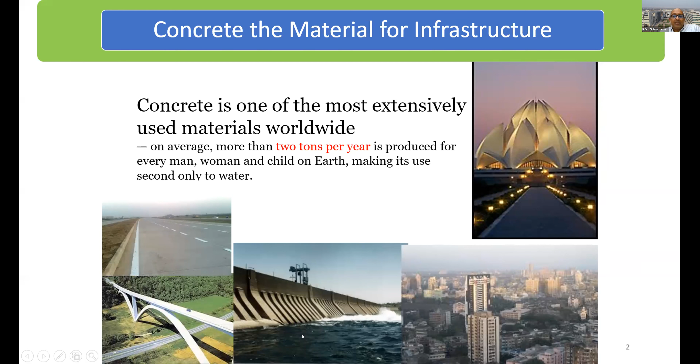Now, where do we use it? It goes everywhere, right? From our roads to our infrastructure, bridges, dams, buildings, it's everywhere. So the issue with this, of course, is that concrete is made with cement.

And the problem with cement is, if you look at the consumption of cement over the past few years, the past, present, and future, this graph nicely captures the cement consumption in the past, where we are today, and where we would be going in the future. If you look at the 1990s, starting from there, red is aptly colored for China, blue is India, yellow is all the other developing countries, and light blue is the developed, industrial countries.

If you look at it, China, even in the 90s, was probably the leading producer. But if you look at the cement being consumed in China today, it is enormous. And a lot of it goes into infrastructure. They have developed their infrastructure. Their economy has been growing on the back of the infrastructure they've been able to provide.

If you look at India, we are not far behind. Today, India is the second largest producer of cement, and all of our cement production is captive. We are not in any position to export. Whatever we produce, we consume. But going forward, if we go to 2050, India would become the largest producer of cement and the largest consumer of cement.

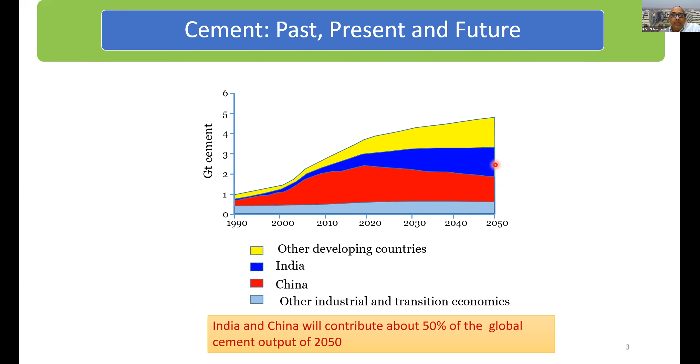Now that has a lot of repercussions because of several environmental issues, resource limitation issues, and energy issues that we will have to address. If we are not able to get to this point where we are producing cement in this quantity, or find some alternate for it, no infrastructure will come up in place, and then we can forget about having 8.5 or 9 or 10% growth of GDP. GDP cannot grow unless we put infrastructure in place.

Now, what are the challenges in cement production? Major challenges, and the numbers are staggering. In 2050, the projected demand is 750 million tons of cement per annum. This is the projected demand in India.

Now, if you look at cement, the major ingredient is limestone. And today, India is a limestone-rich country, so we have not been importing limestone; we use our own limestone to make cement. But the current available reserves of limestone are expected to last only 35 to 40 years. This is the good grade limestone that goes into making cement, and that good grade limestone is only going to last us 35 to 40 years.

Then, cement is an energy intensive material. It takes a lot of material and a lot of energy to produce. So if we want to continue making cement, we have to not only look for alternates to the primary ingredient, limestone, but also look for alternate sources of energy.

The third thing cement has been knocked upon is carbon footprint. Cement has a very large carbon footprint. Today, cement production is the third largest anthropogenic contributor of carbon dioxide in the atmosphere. This is a very heavy price we pay for producing cement. The reason it is the third largest anthropogenic source is not that every gram of cement produces a lot of carbon dioxide, but the sheer volumes. Cement production does involve carbon dioxide production, but the volume of cement we produce is so staggering that we contribute significantly to global carbon dioxide emissions.

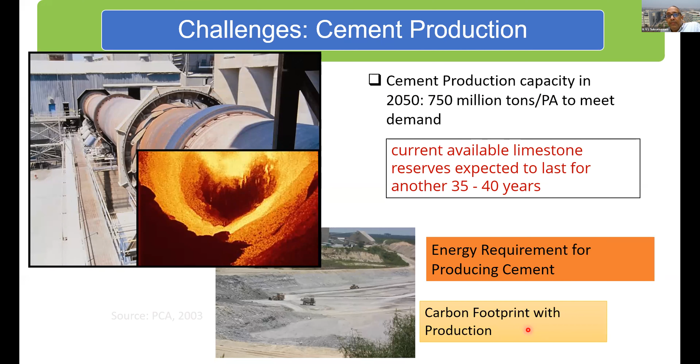So these are all major challenges that have to be overcome if we are going to talk about construction of the future, particularly using concrete. Now, how are we addressing this? Some part of this has already started. People started realizing this, and we started addressing this.

Today, if you look at cement, what used to be cement, it used to be clinker with gypsum. This is what we call OPC, the ordinary Portland cement. This is how cement was conventionally made.

Today, we are starting to look to replace clinker, the primary ingredient that we grind to make cement. So we are trying to reduce the clinker factor in cement by introducing additional supplementary cementitious materials like fly ash and slag, most of which are waste materials. So basically, it's a double advantage. We use waste materials, we reduce the clinker factor, and thereby we're able to produce concretes which have lesser material consumption, lesser energy requirement, and lesser carbon footprint.

Now, going further, there are other cements in production, an alternate cement going by the name LC3, where the clinker factor is reduced even further with the use of calcined clay. This calcined clay is not a good grade clay, it's basically the waste clay that often lies as mine overburden. They're able to reduce the clinker factor even more substantially while producing a cement that gives better properties than even the ordinary Portland cement.

So this work, understanding the chemistry, producing the material, all of this is currently ongoing. Then there's a whole new breed of materials called alkali activated materials, also called geopolymers, where we basically don't use cement at all. There is no clinker. We directly start with waste materials like fly ash or slag, alkali activate them, and we're able to produce cements which, colloquially, we call geopolymers.

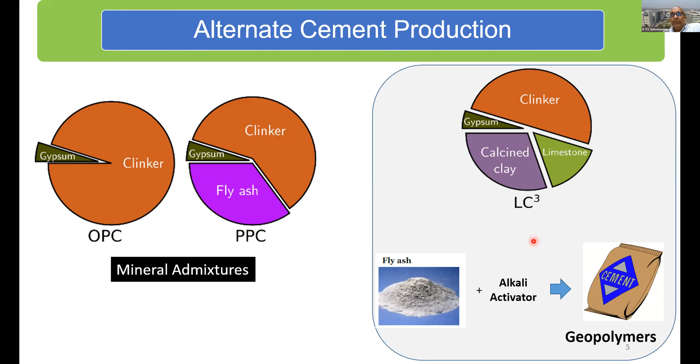So these are all concurrent developments taking place on the material front, where we are trying to address this challenge that we see in the future of supplying cement that would go into making the concrete we need for our infrastructure. Now, there are also challenges with construction.

One of the primary challenges with concrete construction is that we rely on forming at site. Forming at site means we typically assemble the formwork, pour concrete into it, wait for some time as the concrete gains strength and takes the shape of the formwork, and then we open the shuttering. Now, what that does is it limits us to using rectilinear shapes.

That means most of our structures, if you look around, are rectangular shapes, primarily all along. The reason is the formwork limitation - I'm limited by the formwork I can produce on site. Now, we know from basic mechanics that rectangular sections are not the most efficient sections we can use in construction. Perhaps something like an I or T section is more efficient structurally, but that is limited when we are talking about forming on site.

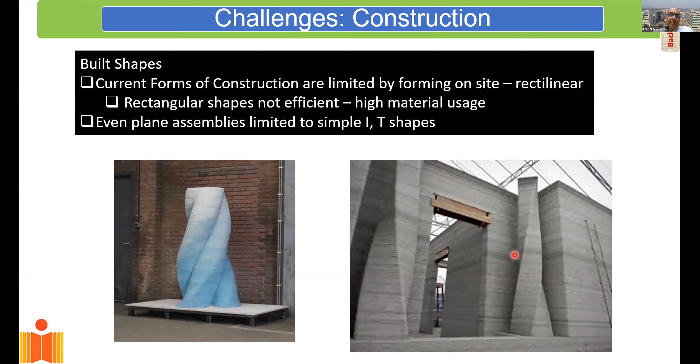That means I have to step out of this domain and start producing structures more efficiently with less use of materials, which give me the same performance and are lighter and take less material. But then I have to come up with new forms of construction. And this is where the other stream of research is happening, in terms of improving construction techniques.

Just to the other challenge, mentioned in the introductory messages - we are all looking to build faster. Everywhere we turn, we want to construct a building as fast as we can. Now, one of the limitations here is again the formwork, because the way we make concrete is I have to assemble the formwork, tie the steel work, then pour concrete. That limits the cycle time I can achieve with each slab. So we need to speed up construction.

We've managed to do that with improvements in formworks. But what if I can produce concrete without formwork? That is what we are working on. A lot of us are currently engaged in research trying to produce this form-free concrete. Form-free would mean that I don't need formwork — I can directly print a structure. 3D printing is a colloquial term used, but it's essentially adopting the techniques of additive manufacturing into construction.

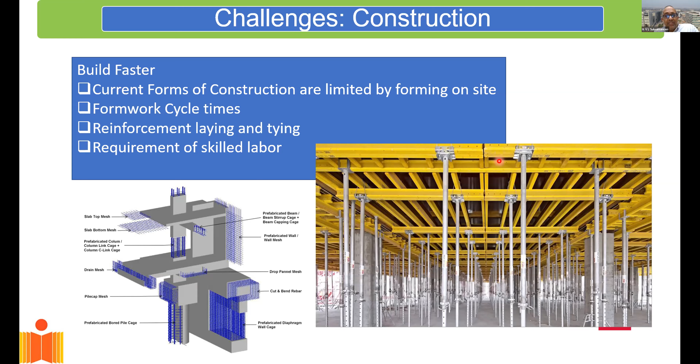These are all challenges that need to be addressed if we are thinking about sustainable construction of the future. Sustainable concrete construction of the future means we have to make concrete responsive to the requirement — I have to be able to make concrete that delivers on delivery and placement, producing concrete that meets my requirements as I'm placing it. I'll give you a few examples of what I'm talking about here.

It has to be long lasting. It has to ensure performance. Once I make a concrete structure, it should perform over its life without having to be repaired, and that life itself should be long. So I'm looking at structures that last long and give me the same level of performance. If it's a bridge, I should be able to use it — it should be serviceable over the life of the structure. While the life of the structure itself, I'd ideally like to double or triple, or make structures last millennia instead of centuries.

Then we're talking about low quantum material usage. I want to make concretes which, A, produce structures using less concrete, and B, use concretes with less cement, or probably use alternate materials. These are all the challenges we are looking at in terms of producing sustainable concrete structures in the future.

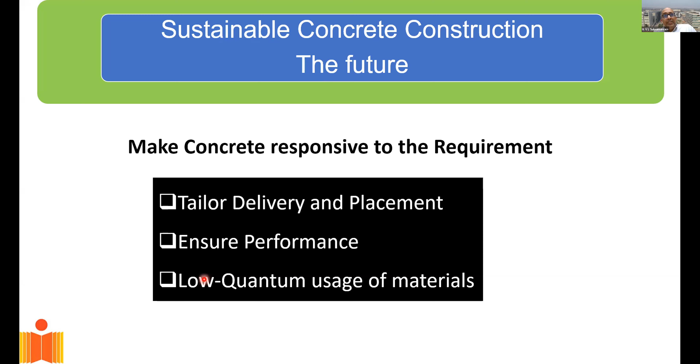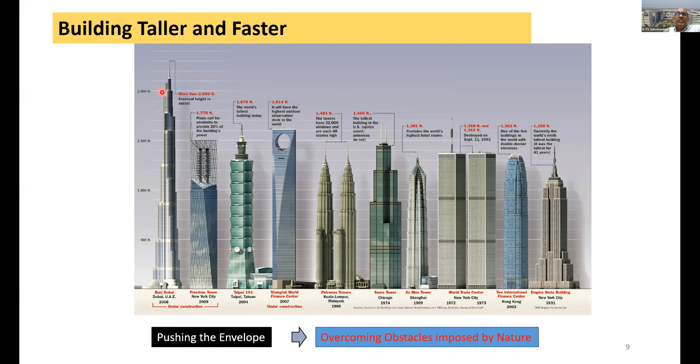So there is now an inherent advantage that concrete offers, becoming the choice material for construction of super talls. Now, some more statistics: if you look at the 100 tallest buildings in the world, 59 of these are in Asia, 23 are in the Middle East, and only 18 are in the rest of the world. That means in terms of technology, for once, most of the advancements, at least when it comes to implementation, are happening either in the Middle East or in Asia — there is very little happening in the West. That's the exciting part of this construction.

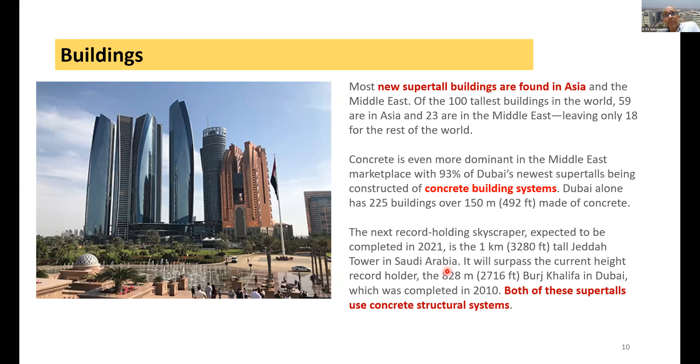The second thing is concrete is starting to play a more dominant role in the structural systems. Burj Khalifa, the current tallest building, and the other building planned in Saudi Arabia, which is one kilometer in height, the Jeddah Tower, also has a concrete structural system. This means concrete is now able to deliver the performance that is required. So let me again harp on this topic of talls and super tall buildings.

Suddenly, the weakness in steel was exposed, and after that, concrete started playing a more dominant role. But concrete was already starting to increase its share from the 1980s. Now it's come to a point where today, 63% of buildings over 200 meters tall, completed in 2018, had concrete structural systems.

Now, concrete combined with composite construction, if you look at the construction of super talls today, these take up the lion's share of construction. And if you look at pure concrete, the share of pure concrete construction is also increasing.

The reason that is happening is because we are now able to produce concrete that delivers performance in terms of strength, which is the obvious thing. We need concrete to be strong. If I want to build a super tall, I need concrete to be super strong. Now we are able to produce concretes that are very, very strong.

But the story doesn't end there. We are able to now produce concretes that are pumpable. I can now produce concrete mixes, and I have concrete technology that allows me to pump concrete to 800 meters in height. I can literally pump it to that height. That is a great advantage when I'm trying to produce a structure that is a super tall.

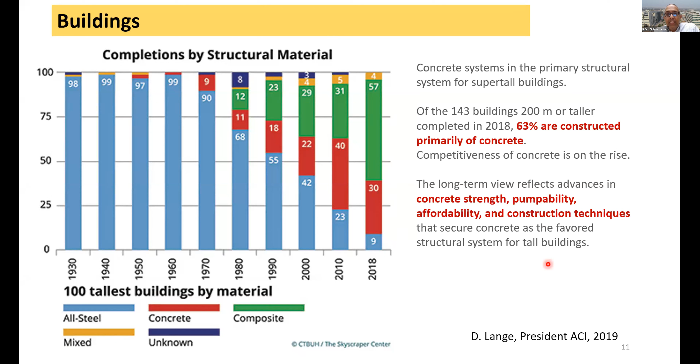So here I have a material that I can engineer. I can engineer the material to deliver performance, which is cheap, and therefore it is set to become the material of choice in the future. It also offers us the advantage of recycling—now we're talking about recycling concrete and using it as aggregate in concrete, so it is a very recyclable material. All of these things combined are basically pushing concrete as the choice material for construction.

Now we talked about performance. One thing that people researching in concrete have realized is that we need to come up with performance-based design. Just to give an introduction of what performance-based design is: this is a methodology where the criteria, whether structural or material criteria, are expressed in terms of achieving a performance objective. So I now express the requirements in terms of performance that I expect from the material, not something merely limited to strength.

When it comes to concrete material in particular, there are two things now being looked at. One is performance during formation—that is, as I'm placing my concrete. This in itself has become a major field where we are expecting concrete to perform even while I'm placing it. I cannot do form-free construction, digital construction, unless I am able to produce concrete that meets that requirement, and so that has become an important part of performance evaluation of concrete.

The other part is performance during service life. I've made my concrete structure, I put it in place, now I want this to be durable, I want it to be long lasting. So these are the two criteria that we now look at when we're talking about performance of concrete structures.

And of course, you contrast this with the conventional method where everything is prescriptive, and somehow we assume that if you follow the current code of practice, the grade of concrete, the M designation that we have, somehow provides us all the answers. Grade is just a strength measure of concrete, but somehow we assume that if I have a stronger concrete, it's also durable. Later in the presentation, we'll realize that strength, in fact, does not directly tell us about durability.

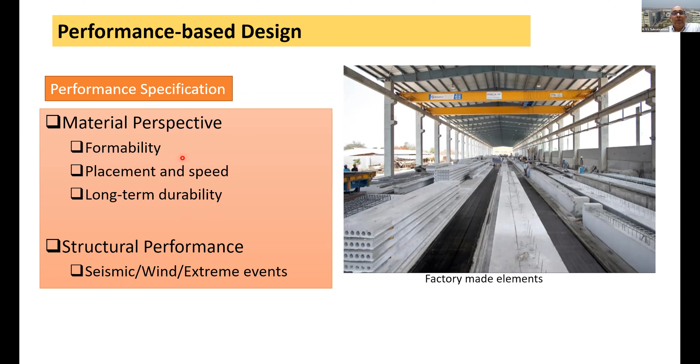The structural performance specs are already in place. People have worked on performance-based design, particularly for seismic design. This has been advocated and is slowly finding its way into codes of practice. So this already exists, but from the materials perspective now, a lot of codes are moving into performance specs for material design.

Just to show you performance measures of concrete: now we're talking about performance measures of fresh concrete, things like flow, pumpability, filling ability. These are becoming essential performance objectives by which we judge the performance of concrete in the fresh state. Then there's the performance of hardened concrete.

The performance of hardened concrete comes down to strength as a primary criterion, because as a structural material it should be strong, but also long-term durability. This is also now getting tagged into the performance measure of concrete. If I'm able to satisfy these two, I would have assured performance from the structure.

Just to give you one example of a performance measure, this is the Union Square building in Seattle, where they've used concrete that is 131 megapascals. So it's very strong concrete, but the modulus of elasticity was also specified—a minimum 41 GPa modulus of elasticity was required for stiffness.

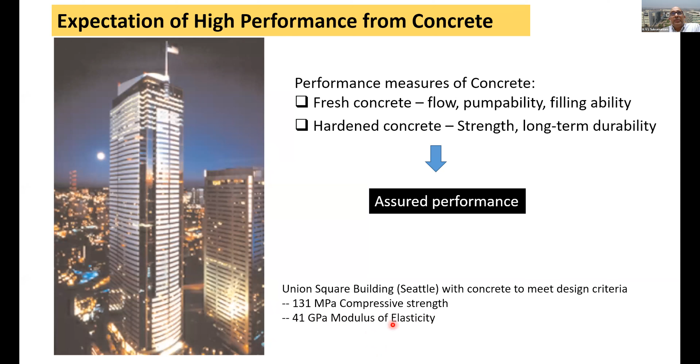And if you remember, the sway or deflection of a building depends not on the strength but on the modulus. So in this case, they specified this as a requirement of the concrete, one of the properties that was specified.

So if I now want to start making concrete that I can tailor, here is what is required from concrete: we require concrete to flow like water—that's one of those things most people desire. It should set on demand, that is, once I fill the form or place it, it should set after I put it in place. It should gain strength very rapidly so I can do fast construction.

It should be durable to infinity—that's of course a dream. It should look like new without maintenance, so once I've made a concrete structure, it should maintain its own appearance without much investment of money. And of course, everything has to be managed at low cost.

Now, the way we are taught concrete is that it's a basic combinatorics of cement, water, and aggregate. But if I have to hit all of these objectives, I cannot do it just by playing around with the basic combinatorics, no matter how hard I try. So the only way to do this is by bringing in admixtures.

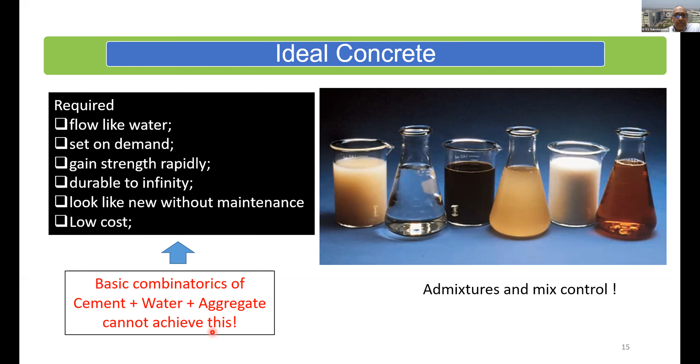So today, a concrete mix is a very complex mixture—of course the basic elements, cement, water, aggregate, but in addition we have a lot of admixtures: chemical admixtures, mineral admixtures, and a lot of fillers that go into it. It has become a very complicated material where we're able to engineer it by playing around with the composition, bringing in additives to deliver on the performance requirements we desire.

So when we talk about high performance, there's now a performance requirement during construction, during placement, and a performance requirement in service. Let's look at the performance requirement during construction: I would like to engineer the material for pumping—if I have to pump concrete, it should be able to withstand the pressure I pump it to.

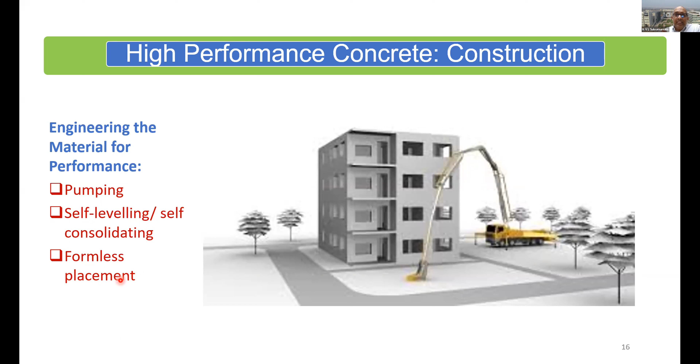Then there's this talk of self-leveling or self-consolidating concrete. I want concrete to fill the form—if I'm using form-based construction—by itself without much effort, meaning it should flow like water. It should be self-leveling, leveling under the force of gravity without having to push it or vibrate it. Then, finally, there's formless placement, where I can literally print a structure—the concrete, once it comes out of a nozzle, keeps its shape, and I can print the entire structure without any formwork.

Just to show you that this fresh performance requirement is becoming important—this is Burj Khalifa, and concrete was pumped to a height of 601 meters.

The technology to pump concrete is available. I have pumps that can lift concrete to heights requiring a head higher than 600 meters, and the material itself is engineered so that once pressurized to such a high head, the concrete should not segregate. It should flow like a homogeneous mixture. That is easier said than done.

This requires understanding what happens to concrete when you pressurize it and how it flows in a pipe. It's an inhomogeneous suspension - you have aggregate, you have paste. You want to keep everything homogeneous so that once pressurized at one end, it comes out the other end in the same state without showing any separation or segregation.

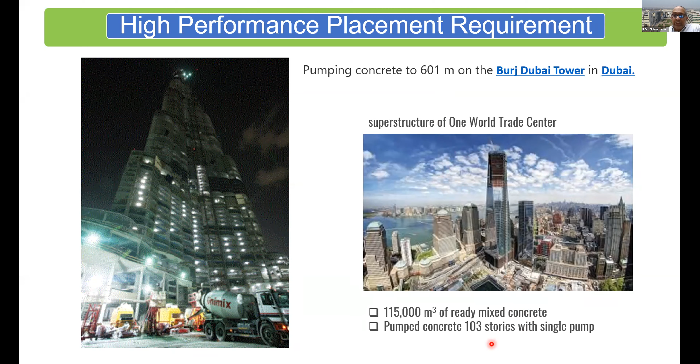This is another super tall building, the World Trade Center, where concrete was pumped to 103 stories in a single pump - just to show how performance-based specifications are coming up now. This is One World Trade Center. The specification placed on concrete was that it had to be made with less than 236 kgs of cement per cubic meter of concrete. This was a requirement placed by the client.

In addition, the requirement was that columns up to 40 floors had to be of concrete of 80 to 95 megapascal strength. The upper floors were 60 to 70 megapascal mix. Of course, these are 56-day strengths, and later in my presentation we'll see why 56-day is important.

The performance requirements are here: the concrete had to have a flow, not slump - a slump flow of 600 to 710 mm. That means it literally spreads itself very easily under its own weight.

It should have the ability to pump at least 15 floors for the 95 megapascal mix. The concrete which is 80 megapascal mix had to be pumpable to 40 floors. And the maximum heat produced in the concrete during hydration should not exceed 70 degrees Celsius.

If this is the performance requirement being put in place, then it's the contractor's responsibility to deliver concrete that meets all of these requirements. This is a typical performance-based specification that is now emerging as we use concrete in construction today.

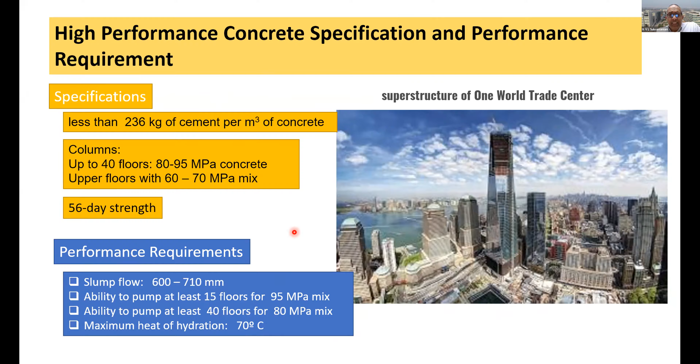Where are we headed with this? We're talking about concrete that meets the requirement of pumping and self-leveling - that means it basically fills the formwork under its own weight. And of course, the final frontier is digital manufacturing, where I can assemble the whole structure layer by layer and print the entire structure without the use of any formwork.

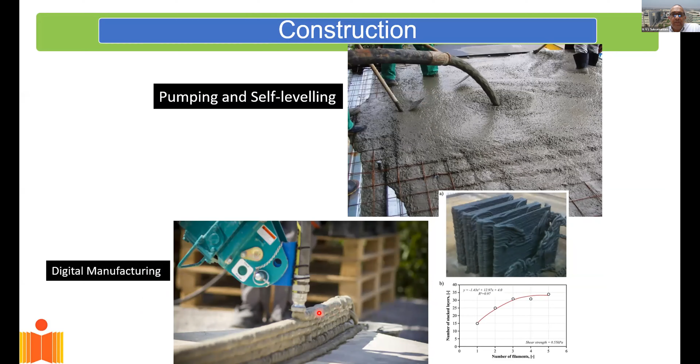If I want to implement this control of performance during placement, we have to start looking at this term called rheology - the understanding of the flow behavior of fluids. We're now starting to understand the flow behavior of concrete. Rheology has existed for a long time, except we as civil engineers have never paid attention to it. Now we are being forced to look at it and bring the concepts of rheology into our concrete mix design. There is also a lot of talk of packing control - how to pack the aggregates.

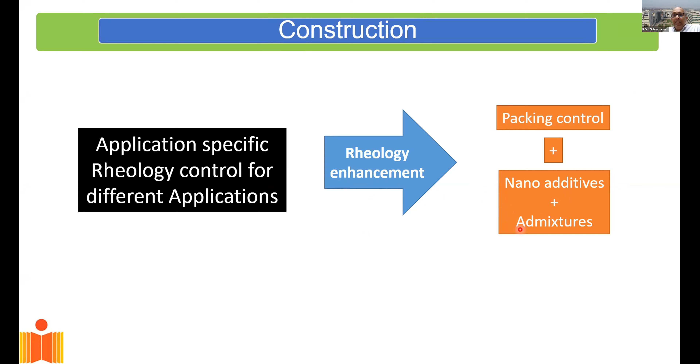Then there is use of nano additives, which specifically enhance performance or rheology of concrete, and admixtures that help concrete flow in a specific way. One of the most commonly used admixtures everybody is familiar with is the water reducer. It basically reduces the demand for water.

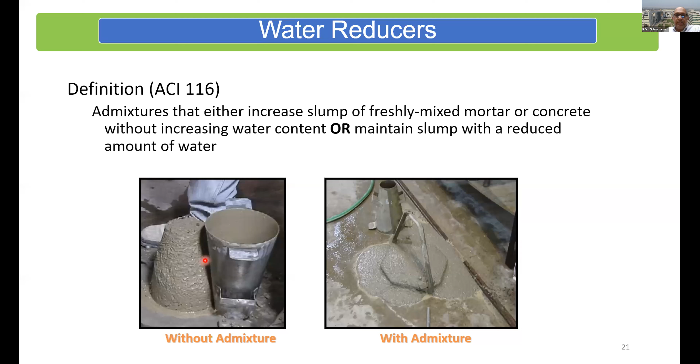Here you have concrete that has a slump. If I add a little bit of high range water reducer to it, it basically starts flowing. This is just to show you what this water reducer does - one of the additives we add to concrete. Basically it decreases this property called yield stress.

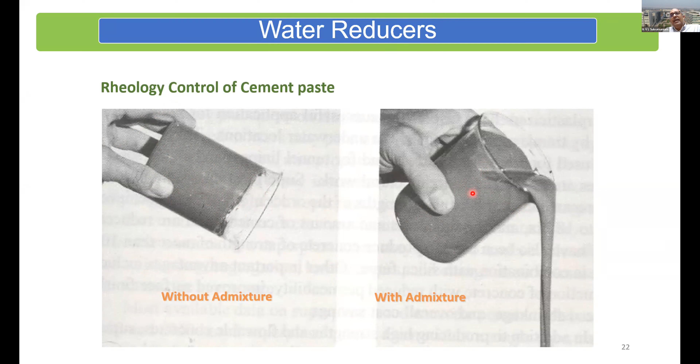Yield stress is a measure that we get from rheology of cement. When we add - suppose I take cement paste which has a very low water to cement ratio - this is how it would fill inside a container. It won't empty out. If I add a few drops of this high range water reducer, I reduce the yield stress and then the cement paste starts to flow.

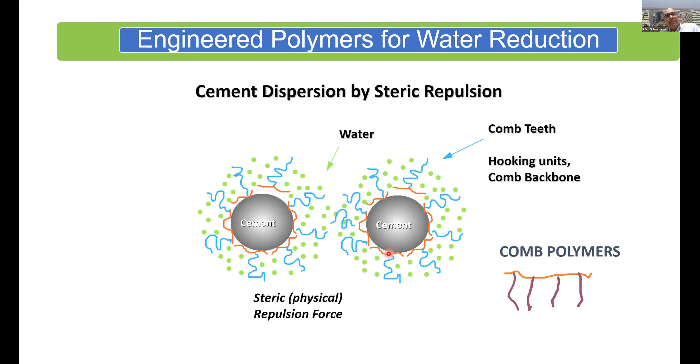These are engineered polymers specifically designed to have a comb-like structure with teeth sticking out. Each of these polymers sticks to the cement grain, producing steric hindrance between cement grain particles and basically deflocculating the cement grain suspension structure. It starts flowing very easily. This is now a field in itself of how to control the flow behavior of cement paste and concrete, and we are bringing in material processing knowledge from other domains to help us in this job.

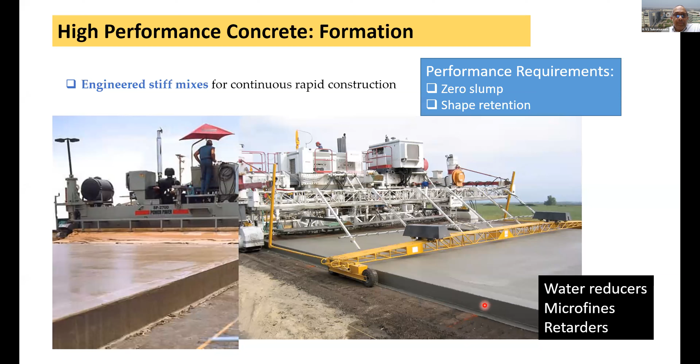So how far can I take this? Of course, I can make concrete flow very easily, but I can also have concrete mixes that are very stiff. One example is an engineered stiff mix used in this machine that forms pavements. As you see here, concrete pavement is literally extruded from this machine, and after it comes out, it doesn't need form work. As the machine pushes the concrete out, the mix is engineered to be very stiff so that it keeps its shape. This is one way of speeding up construction, and it's already being used in pavement construction.

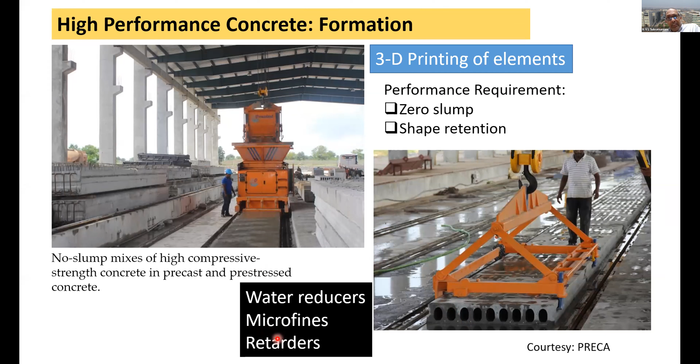The other place where we use very stiff concrete mixes is in producing these hollow core slabs, which are used extensively in precast construction. This again is possible using very stiff concrete mixes. These are literally produced by an extrusion process. You extrude concrete, and after it's extruded, it has the shape, and the concrete is expected to keep these holes and keep the shape without collapsing. That's only possible if I can engineer the material using water reducers, microfines, and retarders - all admixtures we use - controlling the rheology of the material to deliver the stiff performance.

One step further - as we went along, we realized that slump, as we looked at concrete, is not an adequate measure of flow behavior. Just to illustrate that, as we started building and using more and more steel to make longer span structures, the congestion in the steel started increasing. What we understood about concrete at that time was slump.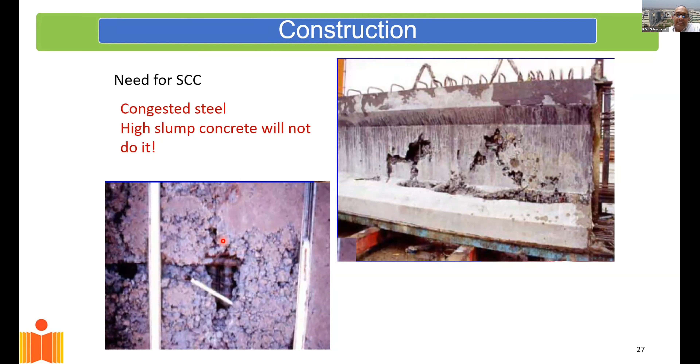Just to show you the need for this self-consolidating concrete, SCC as it's called, this flows very easily and fills all the gaps and cracks that are available. Here's another example of a cast in situ pile, and you can see the concrete just did not penetrate. This is high slump concrete, but it got stuck at these openings in the rebar.

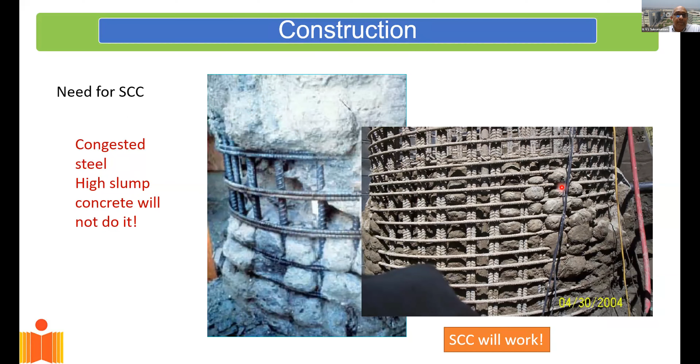At that point, self-consolidating concrete was researched, and now we have this concrete that can flow. It levels itself, basically finding its own level just like water. That is only possible through rheology control of concrete. Today we are producing a lot of self-consolidating concrete.

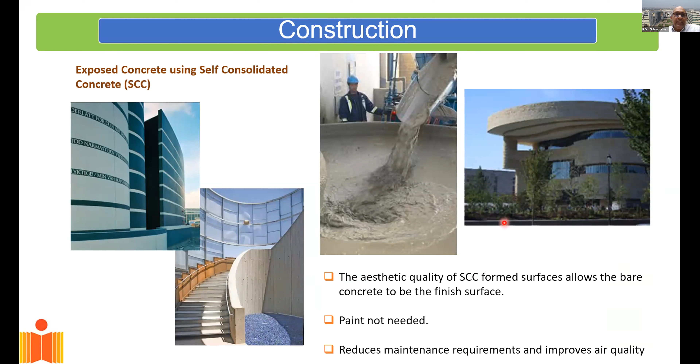Just to show you SCC, we did a lot of research on self-consolidating or self-compacting concrete - so much so that we extensively used it in the IIT Hyderabad campus, where we produced most of our structures plaster-free, basically exposed concrete. And if the video would work, I can show you what SCC would look like.

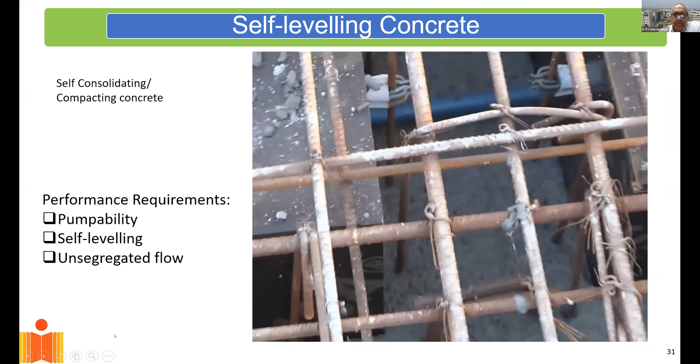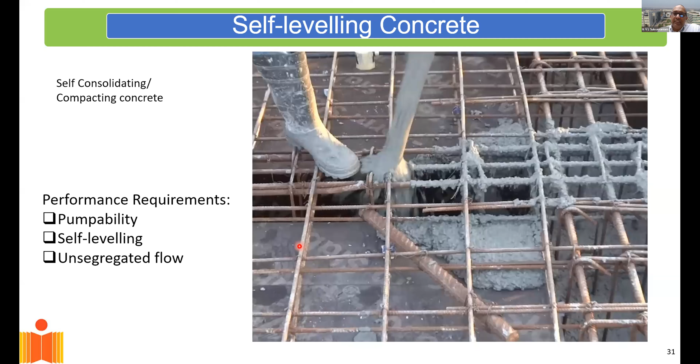So this is concrete that is self-compacting or self-consolidating concrete, which, as you could see before, was able to fill the structure under its own weight. It flows under gravity and compacts by itself, filling all the gaps between the steel without the need for vibration. This is possible by engineering the mix to have this self-leveling ability.

Now we are coming into the domain of form-free construction, which takes us into 3D printing. We expect mixtures that are 3D printable to have three or four essential properties.

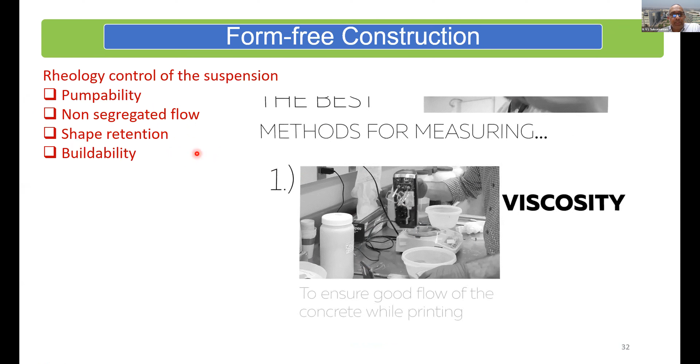It should be pumpable - I should be able to pump the concrete. It should have a non-segregated flow, so as I'm pumping, it should flow like a uniform mixture. It should have shape retention - when it comes out of the nozzle, it should keep the shape of the nozzle. And it should be buildable, meaning I should be able to stack multiple layers and build the entire structure.

That brings us into rheology control with the use of admixtures. We need to understand the rheology of this concrete, which takes us into understanding thixotropy - a rheological property that talks about the internal structure within the cement paste, which we can manipulate to start stacking up layers as we print them.

We need a material mixture that is low viscosity under flow. As I pressurize it, it should flow easily, and it should have a high yield stress, meaning it should keep its shape once it comes at rest.

This is possible by using water reducers. We use a lot of nano and micro fines because these help enhance the rheology, and retarders. We are also starting to use clays into concrete because they give us that fine rheology control that helps us build a structure layer by layer.

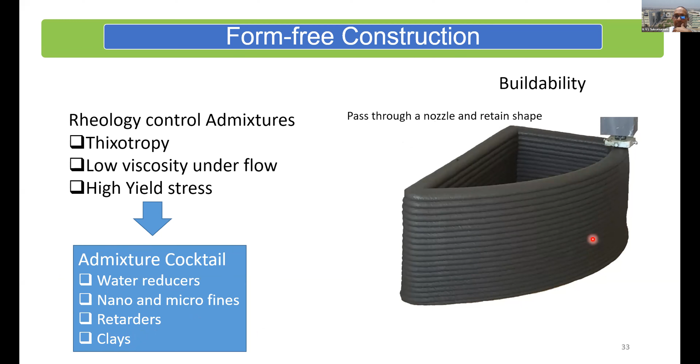With this, I can assemble a whole structure layer by layer. This is just to demonstrate how a structure would be built. If the video would play, you would see that a 3D printed concrete structure is essentially assembled one layer at a time, with multiple layers being stacked up. This is how the layers have been stacked up.

And now you can do form-free construction. You're not limited to rectilinear shapes, and the entire structure is assembled layer by layer.

But of course, there are challenges here - we're still learning how to integrate reinforcement into this concrete. That is an active area of research, which, once we solve that riddle, should allow us to 3D print structures of the future.

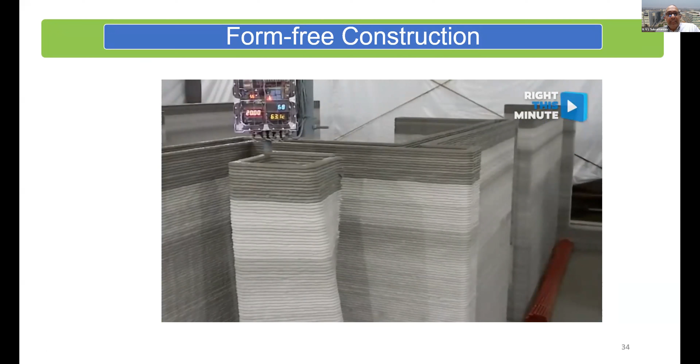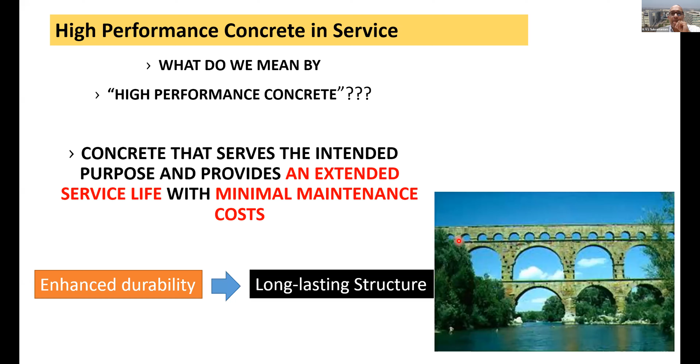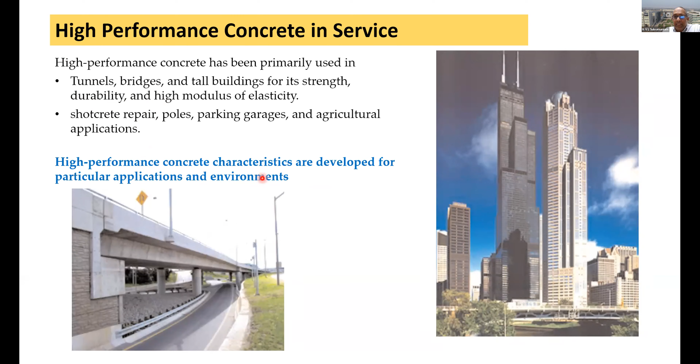Now, high performance concrete in service - we are making high performance concrete, or at least something that goes under that tag. It's extensively being used in bridges, tunnels, high-rise buildings, etc. This high performance concrete is being developed for particular applications and environments, because I have to tailor the concrete to last long in the environment in which I place it. Therefore that becomes important - high performance concrete is a concrete that has been designed to be more durable.

That is the key thing, and if necessary, stronger than conventional concrete. So we are removing the link between strength and performance - strength may be required, may not be required. It's basically the durability that is important. HPC concrete mixtures are composed of essentially the same materials as conventional concrete mixtures, but they're proportioned, designed, or engineered to provide the strength and the durability.

That's the key thing. This material engineering has now come into our lexicon, into our dictionary, and which is the durability which is needed for the structural and environmental requirements of the project.

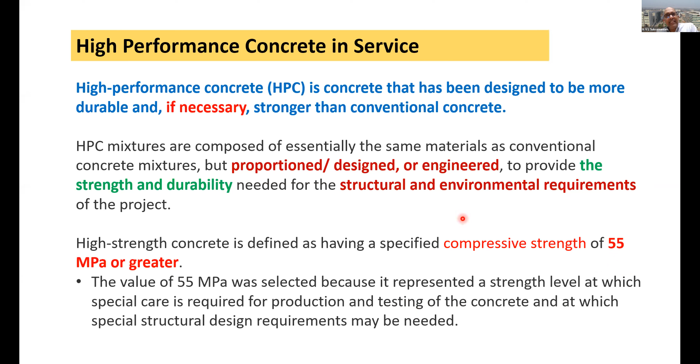So what is high strength? Well, today, at least in concrete, we consider 55 megapascal or greater to be high strength concrete. Now, of course, this is just a random number and it just keeps moving up. So probably for another 10 years down the road, this may be M60 or higher, which would be the dividing line between high strength concrete and the regular concrete.

Now, when we're talking about high performance concrete in service, we have to come up with specifications of concrete. That means we need to understand what is the performance requirement it is supposed to meet. The way it is tackled in the codes currently, if you look at IS 456 or any other concrete code, there are prescriptive measures in the code. And somehow the codes feel that if you put prescriptions in place, you get durability. The way these prescriptions are put in place is by saying maximum cement content, there's a cap put on that. There's a limit on the water to cement ratio. There is a limit on the supplementary cementitious materials, fly ash and slag. There's a minimum cement content also that is specified. So somehow the codes feel that if these are specified, you're automatically assured durability.

But performance measures of hardened concrete, we would have to come up with performance measures and make sure our concrete is measuring up to those performance measures. Strength and stiffness, of course, are primary measures, but then we have to come up with measures of this long-term durability. And of course, the big challenge here is evaluation of performance of concrete. How do I evaluate performance of concrete?

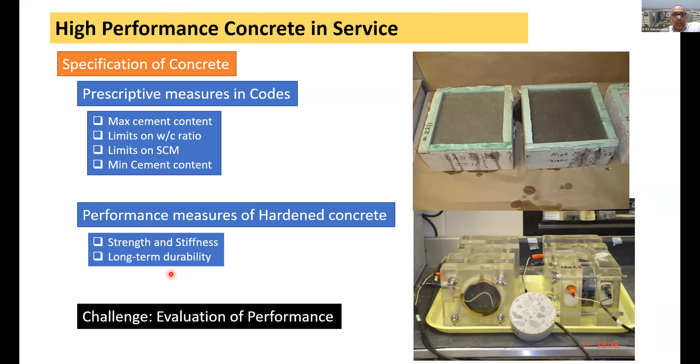So just to illustrate one point of high performance concrete in construction. Now, most of our construction, we specify 28-day strength. Now, if you look at a high-rise building, typically, the concrete that is placed at the lower floors would not see a very high stress, or would not even see any significant stress till much later. So where is the rush, and where is the requirement to specify this 28-day strength?

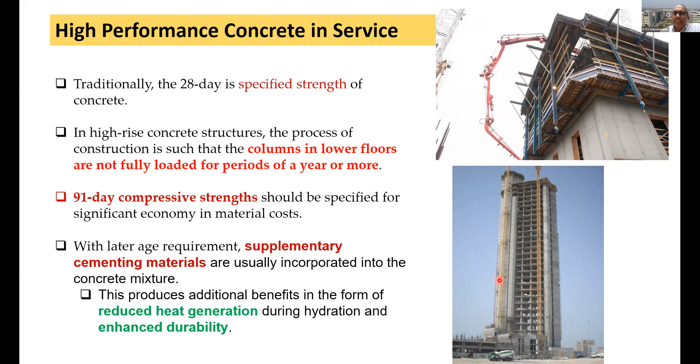So instead, if we can specify something like a 91-day compressive strength, the concrete gains strength a little less rapidly, but then I can achieve this using supplementary cementitious materials that overall reduce the heat generation, and they also enhance durability. So there's a requirement to think about it holistically, where we are not just rushing to specify early strength gain where it is not required, like in this particular example.

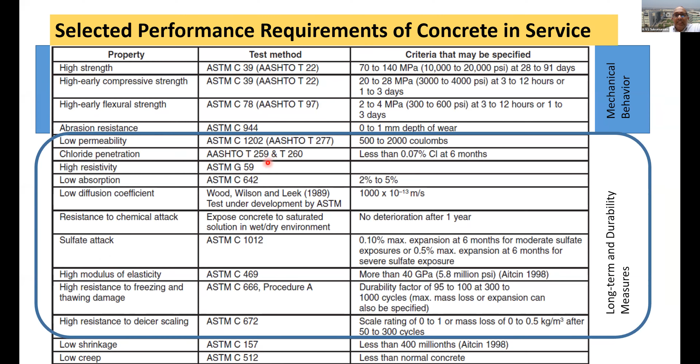Now, when it comes to performance measures, I have to have tests that are available. So here is a laundry list of tests that are available. Of course, these are all American standards, because we need to figure out what is the performance measure that we require. And the performance measures, of course, we have starting from strength to abrasion resistance, to permeability, penetration, sulfate attack. These are all performance measures that we typically expect from concrete. And then we have a list of tests that we can do to assess the performance of concrete against these performance measures.

Now, so the durability that we need to assess, what are the fundamental concerns of durability? The prime concern of durability is corrosion of steel. If I have steel in concrete and the steel starts corroding, the minute steel starts corroding, I start losing my structural capacity. And it is induced by chloride, which gets into concrete, or it is induced by carbonation.

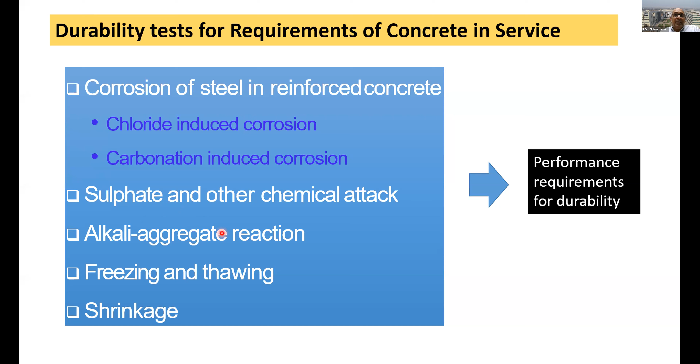Then I have some other material issues, like I can have sulfate attack or alkali aggregate reaction of the aggregate, freezing and thawing when I'm in the part of the country where freezing is an issue, and shrinkage of concrete. And these are all performance requirements of durability. Now, all of them need not be of concern. In some places, only corrosion may be a concern, or combination of these may be a concern. So we will have to basically look at the factors that are of concern and come up with performance measures for those factors that we are concerned about.

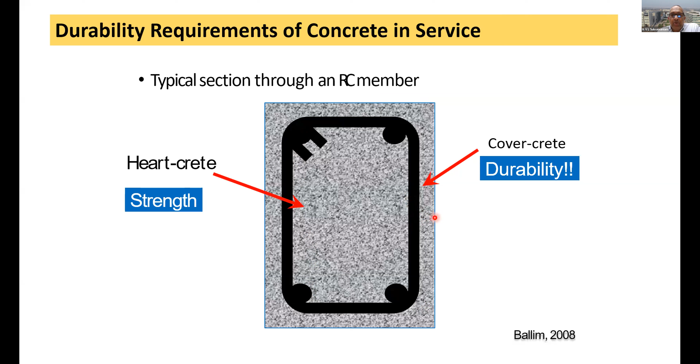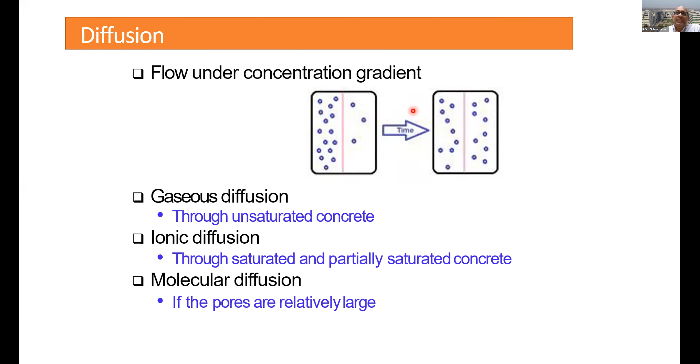If I have to protect the steel, I have to prevent chlorides or carbon dioxide from getting into the concrete. So I have to look at what is known as the transport mechanism into concrete, how these elements, whether it's a gas like carbon dioxide, or ions like chloride ions, get through concrete. A lot of work is happening on understanding how carbon dioxide and chloride ions move through concrete.

That has led to the establishment of durability test methods. We have test methods available that help us quickly evaluate the chloride permeability of concrete, how fast or what is the penetration resistance of concrete to chloride ions. There are different tests that have been standardized for chloride penetration.

If I was to do this in real life, it would take months. If I have to develop a concrete mix design and wait for months for the test result to come out, it's not possible. So these accelerated tests have been developed, which give us results in a very accelerated manner, helping us assess if the concrete I have produced has adequate resistance to chloride penetration.

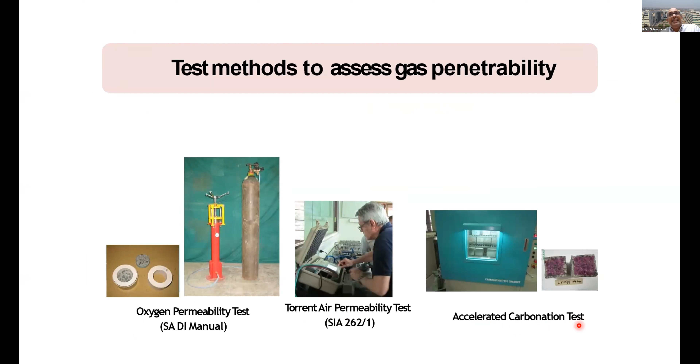We have similarly other methods to assess chloride penetration. There's a diffusion test that measures how fast chloride ions can diffuse through concrete. There are gas penetration methods like oxygen permeability, air permeability, or the accelerated carbonation test, which tell us how fast any gas like carbon dioxide can move through concrete. And there are methods of assessing water permeability, because if water can get in through concrete, steel will start corroding. These are all accelerated tests that give us results in minutes or hours.

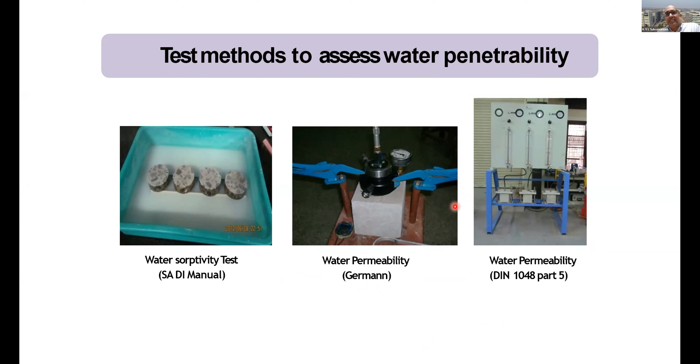Then there's, of course, the measurement of resistivity. Resistivity tells us how rapidly things can move through concrete.

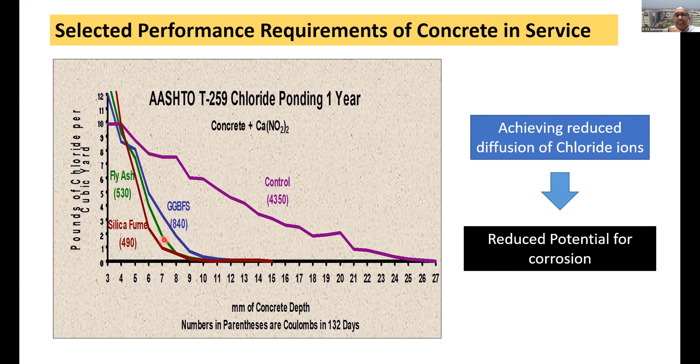So we can engineer this material to cut down on the penetration of chloride ions in concrete. We've also developed these rapid test procedures like the rapid chloride penetration test, which allow us to specify measures I can put in place to ensure, specifically for chlorides, that the concrete is durable against chloride penetration.

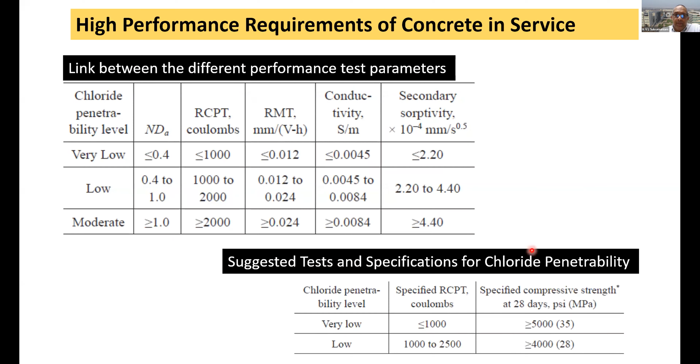Typically, the way we achieve this limitation of chloride penetration is by densifying the microstructure. We basically make the microstructure very dense by adding fillers. And of course, we have accelerated test methods for diffusion, permeability, and resistivity that help us assess if what we have done is correct. How do we then tie this all together?

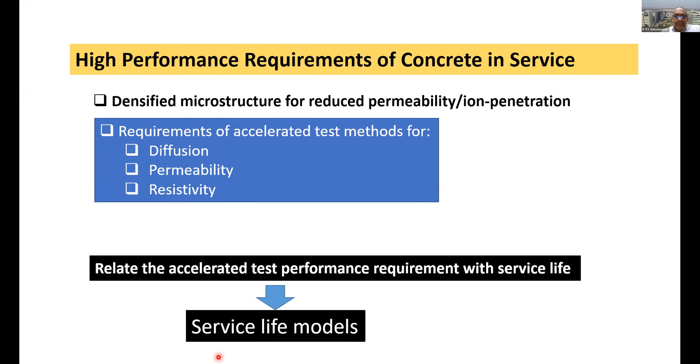We basically take the results that we get from the accelerated tests and put them into service life models. There are several service life models that have been developed. These are quite complex because they bring in the mathematical aspects of ion diffusion or carbon dioxide movement through concrete, but they help us predict what would be the life of a structure.

So suppose I'm designing a structure which is placed in seawater. Seawater is very rich in chlorides. I can run these models and figure out how long it would take for the chloride ions to penetrate through the cover and reach the steel. Once the chloride ions reach the steel, it will start corroding. That gives me a way of assessing what I could expect as the life of the reinforced concrete structure.

So this is now coming into our design of concrete structures, where we're designing for a specific service life, where we say, I will design this structure to last for 75 years, or I'll design this structure to last for 200 years.

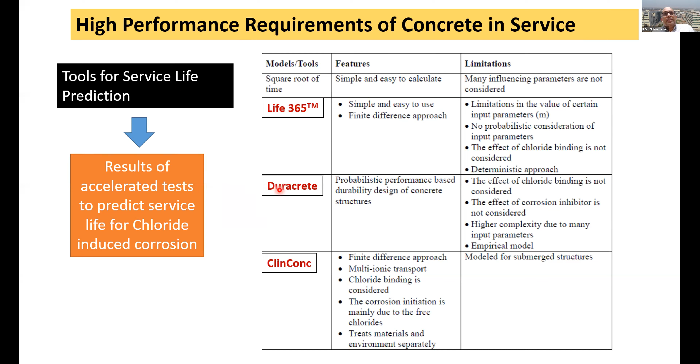And all of that is done using these service life models, which require the results of the penetration tests or the durability tests that I've done before. Just to give you an example of how this was done.

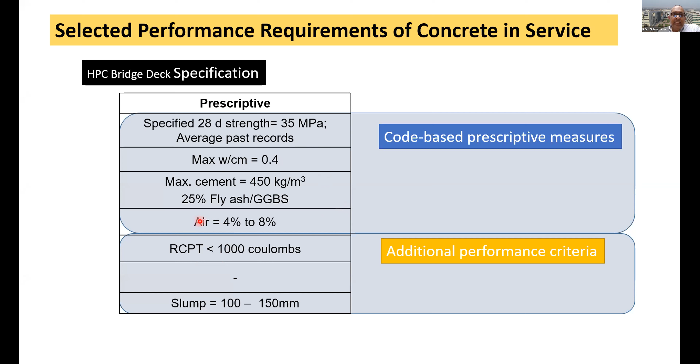Here is the concrete that is only 35 megapascal, basically used in a bridge deck. With the use of ground granulated blast furnace slag, very low chloride penetration was achieved. This was a bridge deck exposed to de-icing salt, used as calcium chloride. Chlorides would get through the concrete and the deck steel starts corroding. To prevent that, they produced concrete that was very densified, with a very low RCPT chloride penetration value.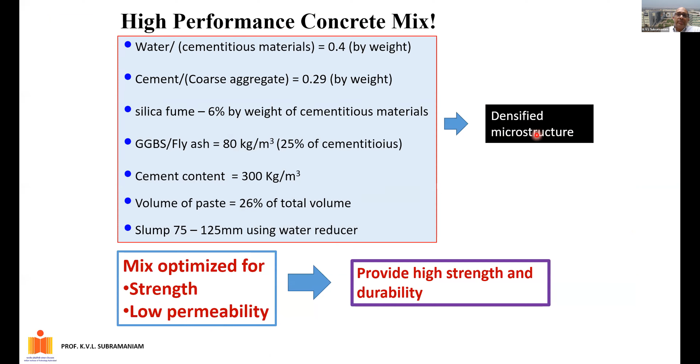The mix design was optimized for strength and low permeability, achieved by densifying the microstructure, and it was thought that it would give us high durability. But within a year, the bridge decks all cracked.

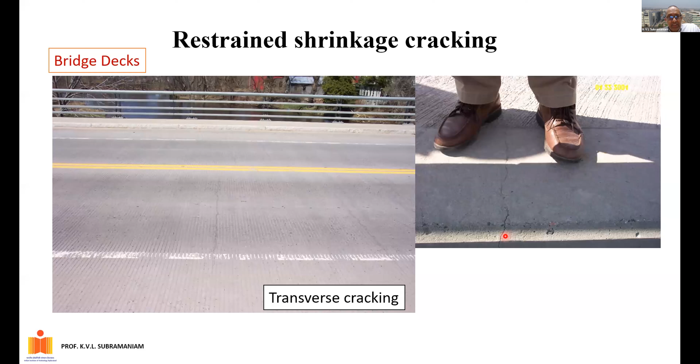This is a photo of the bridge deck, and you can see it is thoroughly cracked. The reason for this does not have to do with structural configuration; this is not a structural crack. The cracking was discovered to be running in areas. This is a simply supported bridge deck, and the cracking happened right in the midspan.

So let me show you this is the bridge deck, simply supported. All the cracking happened in the midspan, and this cracking happened in areas where the concrete deck would be in compression. So it didn't make sense - this was not cracking coming from structural reasons.

The compressive strength that we got from cores was also quite high. The tensile strength was high. The concrete was also of uniform quality.

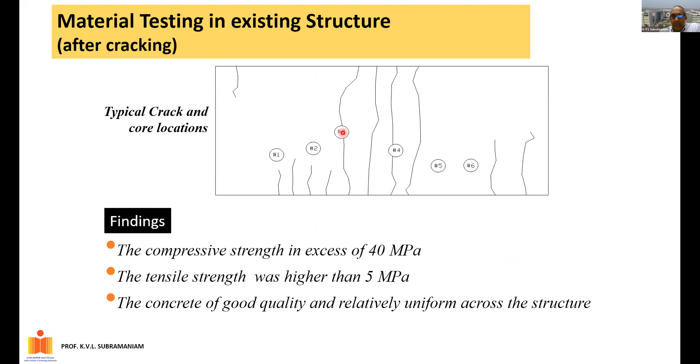Then it was established that when we took the core through the cracked area - so here is a core taken right through the crack - it was found that the crack goes around the aggregate.

So it was established that this crack was formed very early, within the first few days after casting.

Because when we tested the core from a healthy part of the bridge deck - this is the core taken from a healthy part - all the aggregate was split in the split tensile test. That means once the concrete had gained strength, the mortar in the concrete is stronger than the aggregate.

So this is what led us to believe that this crack was formed at a very early age, and it was established that this crack was formed because of shrinkage. Concrete wanted to shrink, and the shrinkage was prevented, and that's what resulted in this cracking.

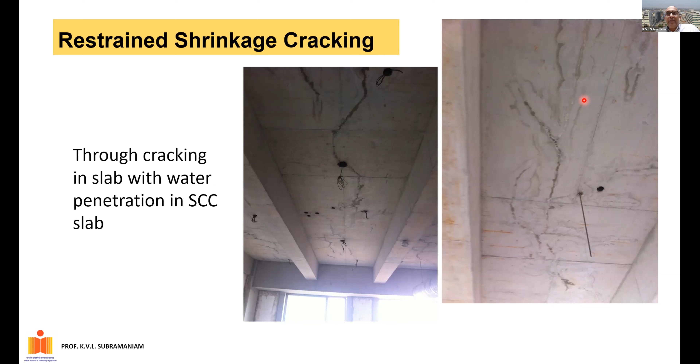And we are now seeing more and more of these shrinkage cracks appearing in structures, particularly where we're using SCC, self-compacting concrete. The reason for that has to do with the densification of the microstructure. We densify the microstructure to achieve one objective, but then it works against us when we are trying to control shrinkage, resulting in more shrinkage cracking.

How much shrinkage can I get? Suppose I take concrete with silica fume in it - I would get almost 1600 microstrain, which is equivalent to raising or lowering the temperature by 120 degrees. So the effect of contraction is the same as lowering the temperature by 120 degrees.

Now, if the concrete is not allowed to contract because of restraint from other members, it is bound to crack. And these cracks happen within the first few days.

Now this requires going back to the drawing board to understand what causes shrinkage. Shrinkage is produced by the paste. Going back to basic engineering, we need to understand packing. When I increase the aggregate size, my paste content decreases, so the shrinkage would decrease. And the paste content plays a critical role.

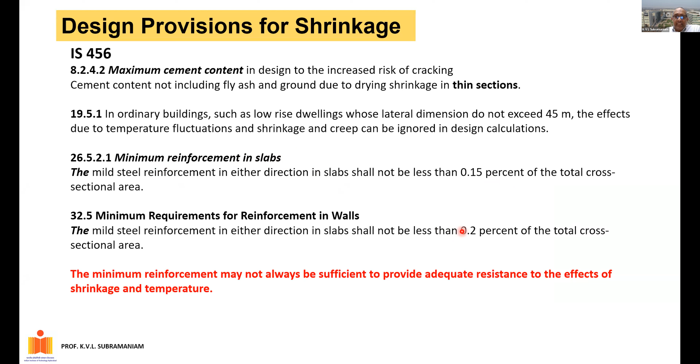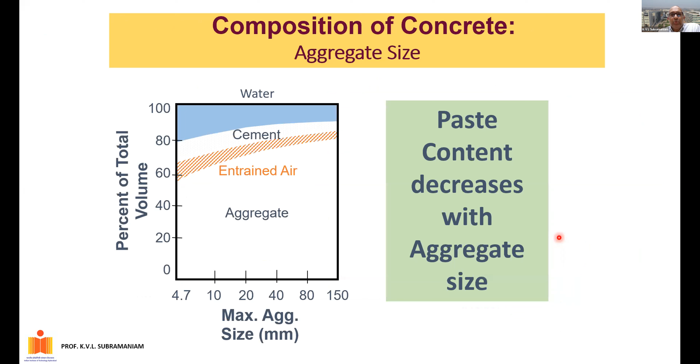So we need to now address this through good construction practices. And of course we have talked about curing. So one of the ways to deliver high performance concrete is to pay attention to construction practices, where we have to compact our concrete properly, have uniform quality, and pay very good attention to curing.

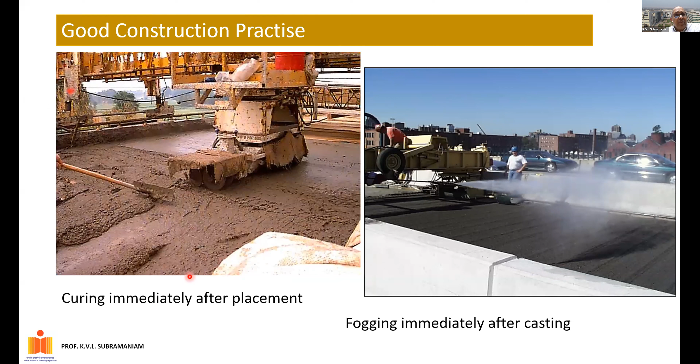But what if, despite all of this, my concrete cracks? Then we are looking at another set of admixtures that have been developed. One of them is called the shrinkage reducing admixture, which is basically a surfactant, and what it does is basically reduce shrinkage.

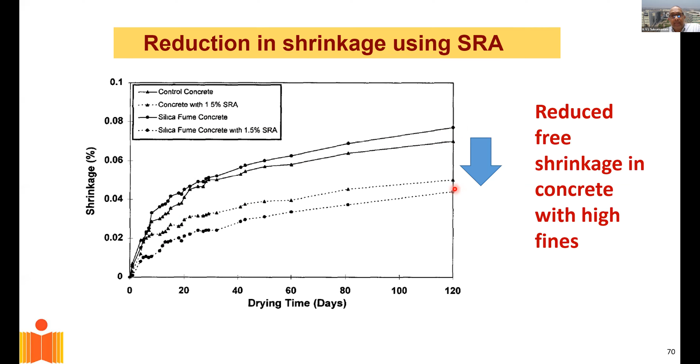There's another set of additives that we're adding into concrete. These are called superabsorbent polymers. Superabsorbent polymers are what go into diapers. These are materials that absorb water, they hold on to water. We mix them into concrete or cement paste, and the superabsorbent polymers absorb moisture, swell, and retain water.

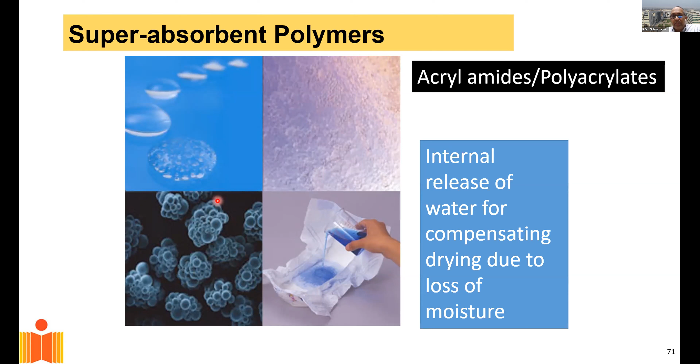And when the concrete starts drying, which produces shrinkage, the SAP releases the water into the concrete mix and reduces the shrinkage. Just to show you, if I don't have SAP in this densified concrete, I'll get a lot of shrinkage. By adding just 0.4% SAP, I'm able to completely reduce the shrinkage. So you can see there's no strain in the concrete, so the concrete does not shrink.

So these are all things that are now happening on the material front that help us address the issue of cracking in concrete, making concrete more durable.

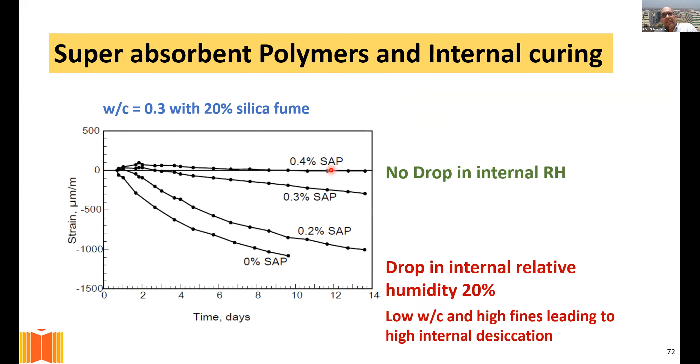So just to conclude, we're talking about performance-based specifications for the material. We expect concrete to deliver in performance. Strength has always been in the picture - we have the standard M designation or the FC prime designation in America that has existed forever. But now we're bringing in durability requirements in terms of ion penetration and gas penetration into the material, which is specifically important from a corrosion point of view.

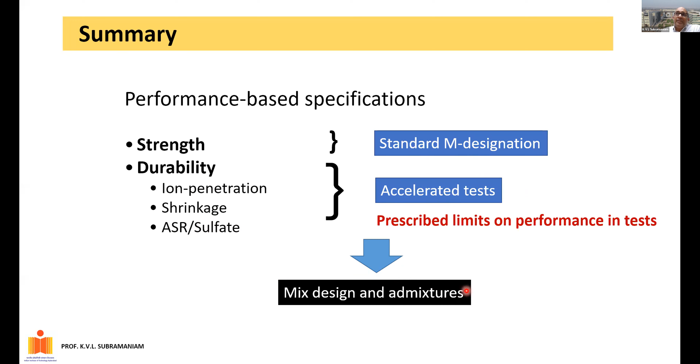We're talking about shrinkage control of concrete, ASR and sulfate resistance of concrete. These are specific problems that happen with specific types of aggregate or specific types of cements. We have developed accelerated tests that help us assess the performance of concrete against these durability measures. And now we're coming up with limits from these performance tests, so that when we develop a concrete mix design, it's not only for strength, but it will be based on trying to match what we have from these accelerated tests. We come up with mix designs using these admixtures that will deliver on these performance requirements.

And finally, if we've done our job right, this is what we should end up with. This is the Pantheon in Rome, built by the Romans. It is made of concrete. It is 2,000 years old. This is the structure as it looks on the outside, and this is the structure as it looks on the inside. It looks like it was built yesterday, and it's 2,000 years old and still going. So this is the very definition of a sustainable concrete structure.

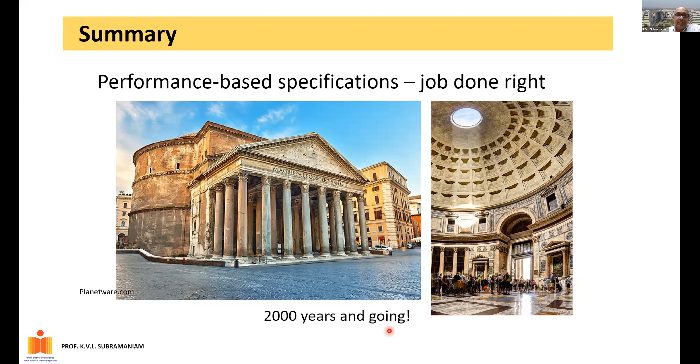So with that, I would like to conclude and open the floor for questions.

Thank you, sir. Thank you very much.

Thank you very much, sir. A valuable, wonderful lecture starting from the challenges in concrete, especially for high-rise structures and high-performance concrete.

My question is, how is this helping us on the codes side? We're talking about high-rise buildings, but the codes still focus on conventional methods. As we speak, IS 456 is being revised, and the entire material section is going to bring in performance-based mix design. So that's happening, and this will be built into the revised codes.

One side we are saying environmental aspects matter. Are high-rise buildings really required for human life? Well, that's one of those things.

It's about technology, and whether going tall is important or not is a debate for another topic. But yes, one thing about going tall is that you have more efficient use of space.